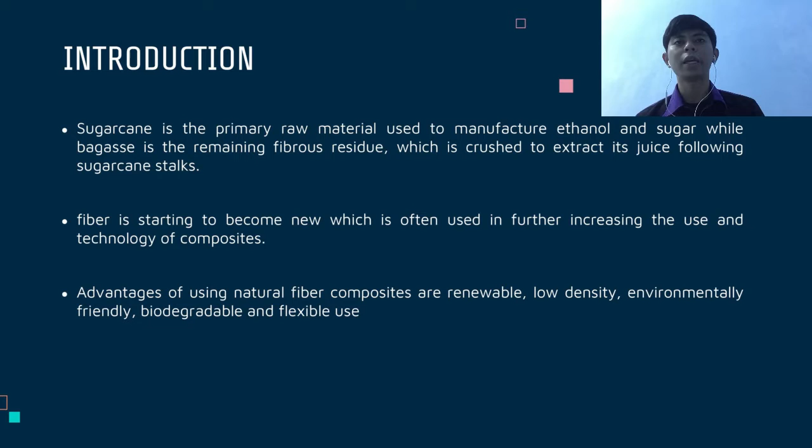So we move to the first part, which is introduction. As we know, sugarcane is the primary raw material used to manufacture ethanol and sugar, while the remaining sugarcane we call bagasse, which is the fibrous residue after we crush it. Fiber is starting to become new, and is often used in further increasing the use and technology of composites. The advantage of using natural fiber composite is that it's renewable, low density, environmentally friendly, biodegradable and flexible in use.

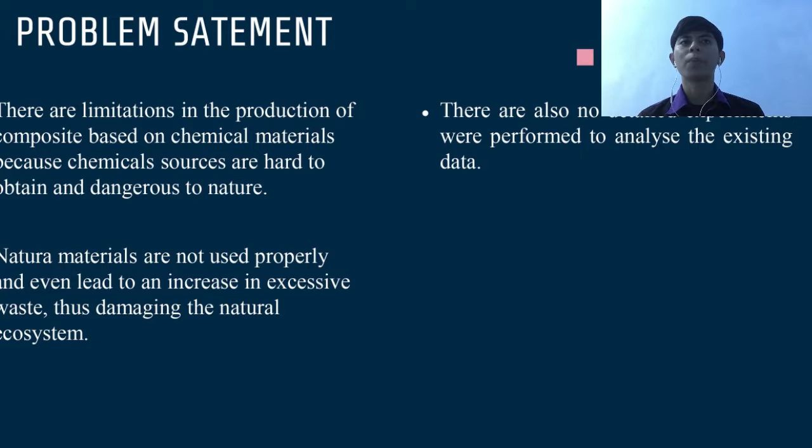Problem statement. There are 3 problem statements. The first one, there is a limitation in the production of composites based on chemical materials, because chemical material right now is hard to obtain and it is also dangerous to our nature. The next one is natural materials in our country are not used properly, and it even leads to excessive waste. This is also damaging our natural ecosystem. And the last one is there are no detailed experiments performed to analyze the existing data.

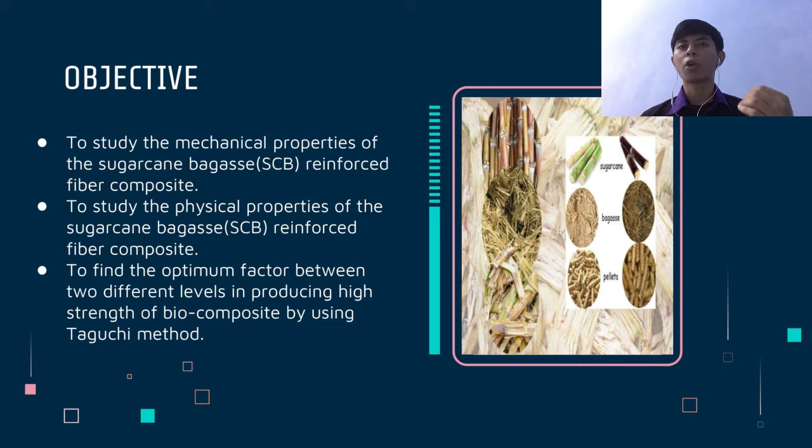For the objective, there are also 3 objectives. The first one is to study the mechanical properties of the sugarcane bagasse reinforced fiber composite. The second one is to study the physical properties of the sugarcane bagasse reinforced fiber composite. And the last one is to find the optimum factor between the 2 different levels in producing the bio composite using the Taguchi method.

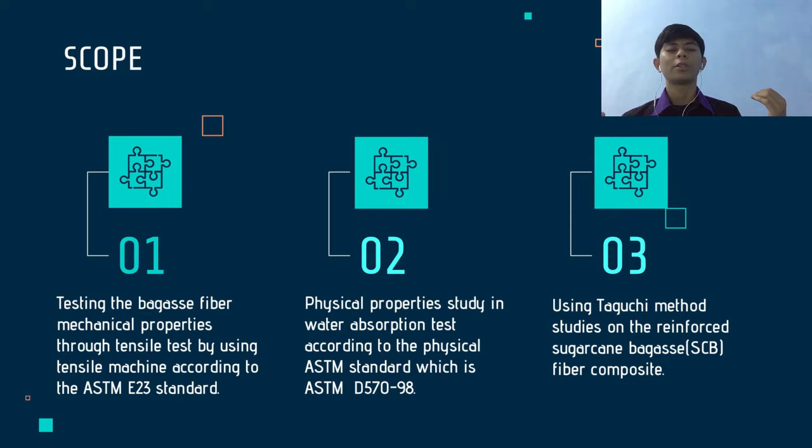For the scope, the first one is testing the bagasse fiber mechanical properties using the tensile test, with the universal tensile machine with the ASTM E23 standard. The second one is the physical properties study for the water absorption test, also using the standard ASTM D570-98. And the last one is using the Taguchi method to find the optimum level and optimum factor to create the best composition of our sugarcane bagasse biocomposite. So we move to the methodology.

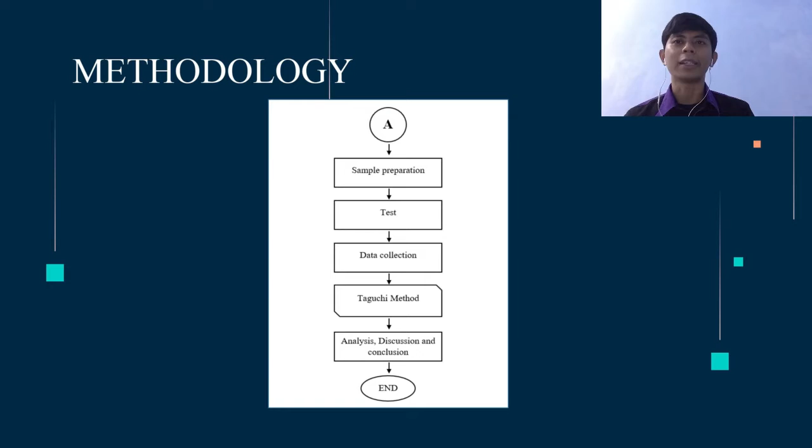This is our flowchart from A until the end. First, we need to do sample preparation, which is our bagasse biocomposite preparation. After the sample preparation, we do the tests, which are the tensile test and the water absorption test. After that, we do the data collection and the Taguchi method, so that we can analyze, discuss and further explain the experiment and the data collection. After that, we conclude all of that in one conclusion.

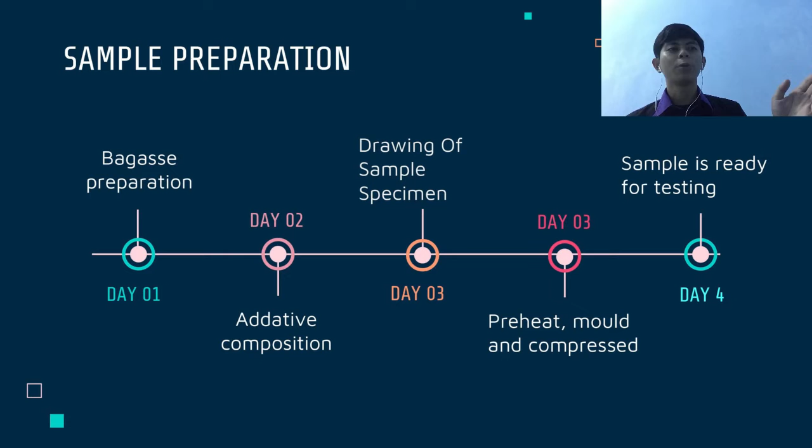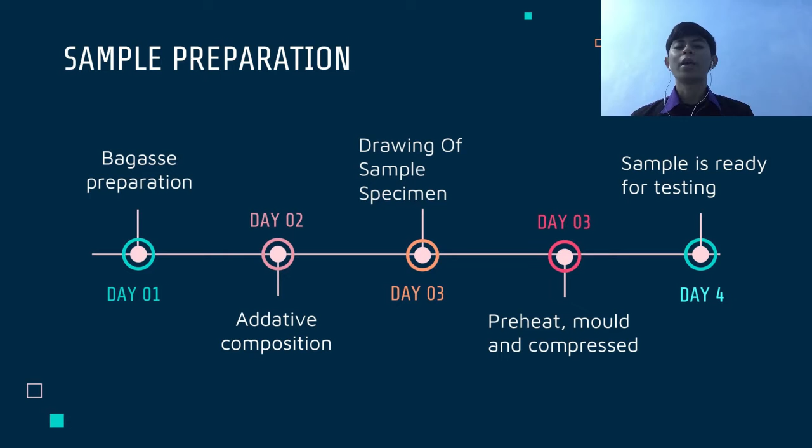We mix it, preheat, mold it, compress it into a mold, and then put it into the hot press and cold press machine. At the hot and cold press machine, the setup is 155 for the temperature and 5 ton for the pressure, the heating time is 60 minutes and the cold time is 20 minutes. After that we get our new biocomposite sample, ready for testing.

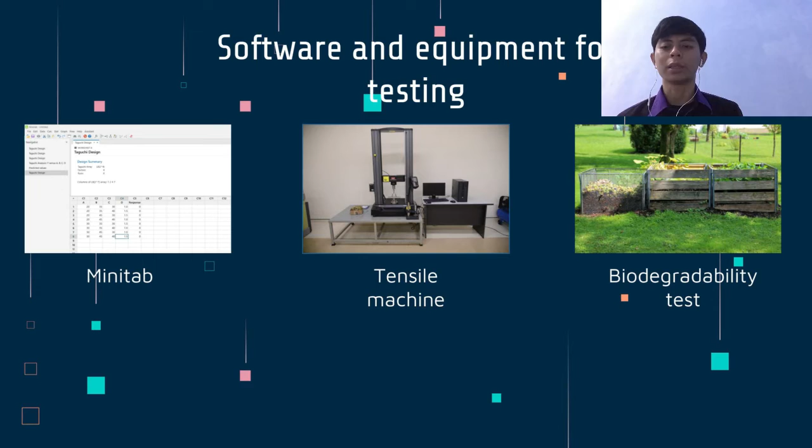This is some software and equipment for our testing. First, we have Minitab, to do the Taguchi method and analyze the data. Next, we have the universal tensile machine to do the tensile test. And we have a small beaker or container to do the biodegradability test. We move to the result and the discussion.

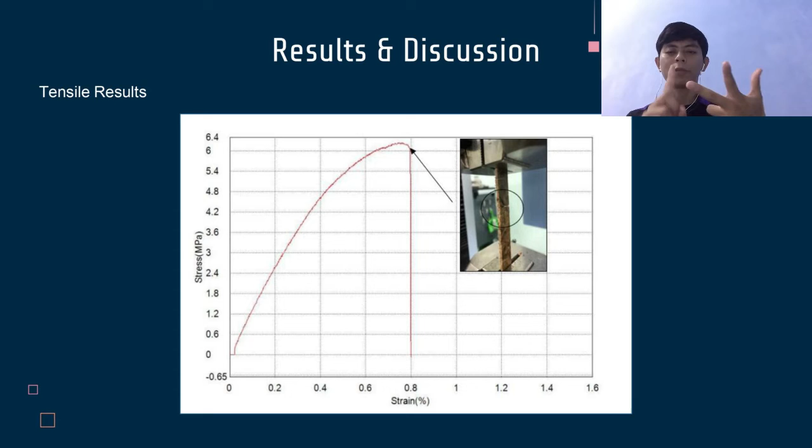This is my result for the tensile test. We did almost 24 tests, repeating each sample 3 times, and then we get the average value. The first graph represents the maximum parameters: the highest weight, 10 gram of bagasse, the bigger size, 10 mm, the maximum PVA, 5 gram, the highest cassava starch, 42 gram, and 30% glycerol. We mix it up, make a sample and test it.

So this is the graph. The graph also represents the highest value compared to the other parameters, which is the maximum parameter at the highest value for the tensile test.

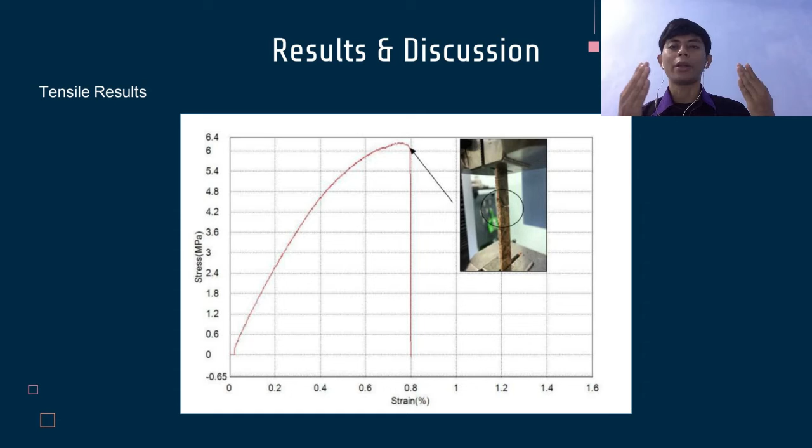So from the graph we can see that the peak point is the highest tensile value, which is almost 6.24 megapascal, and after the peak point there is no reading, or the reading is reduced maximally because our sample is breaking down, so the machine cannot define any reading.

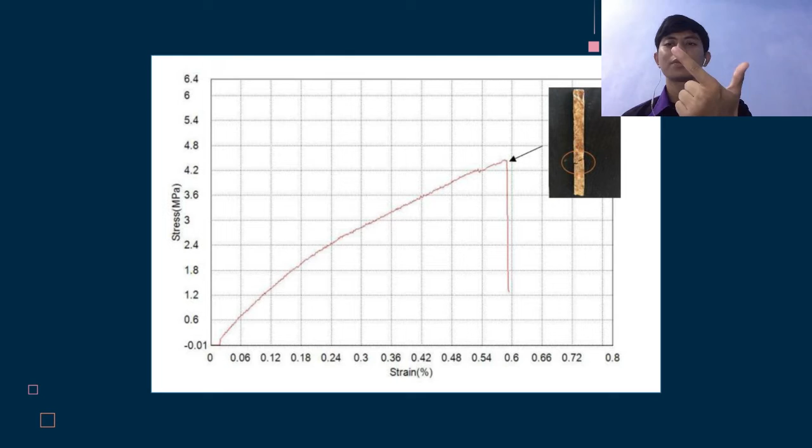So we move to the next graph, which is this graph. For this graph we use the maximum weight, maximum size, but we use the minimum level of the PVA and minimum value of the cassava starch and 30% of the glycerol. So the graph is like this. The pattern is the same as the first graph, but the value is lower than the first one. So the maximum point of the tensile value is 4.51, and the breaking point is at the bottom of the sample.

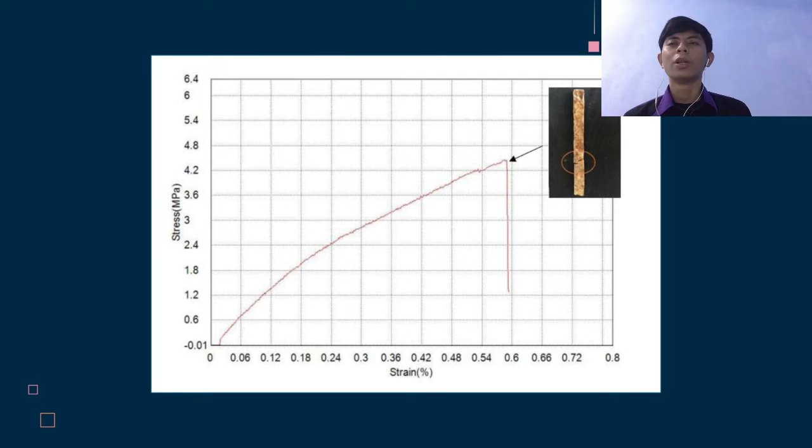So I need to explain that the breaking point of every sample is at a different point because we don't know the composition of the bagasse in the sample. I mean that maybe the bagasse is low density at the higher part, so it is easy to break at the higher part, and maybe it will be at the lower part or in the middle. So it depends on the composition also. So this is the same explanation as the first graph. The difference is just the maximum tensile value.

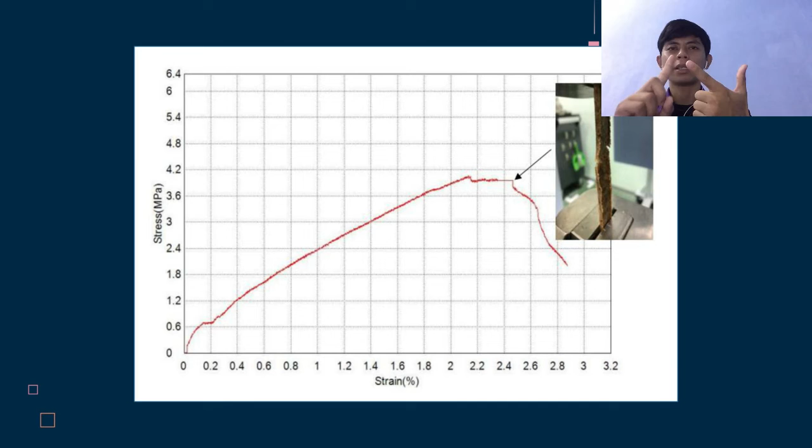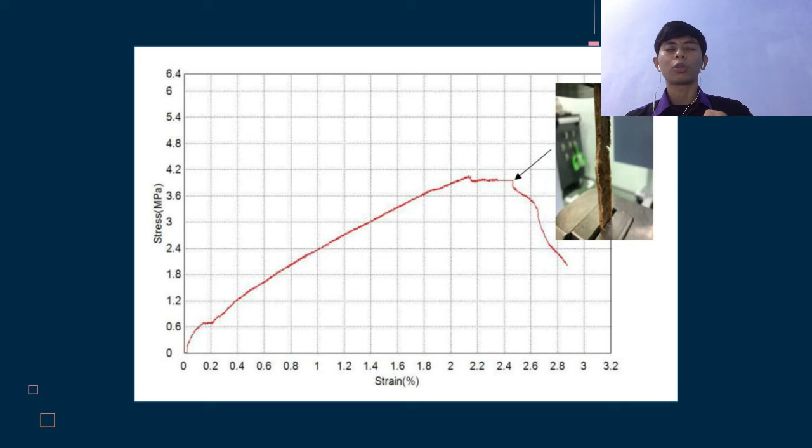We move to the next graph also. This graph represents the lower value of the bagasse, the highest size of the bagasse, the highest PVA and the lower cassava starch. This graph is a little different from the graph before, because we can see in the picture the breaking point is not a break like the one before, it is just stretching. So when it achieves the maximum tensile stress value, it still has a value because the material is not totally breaking up. It's just necking.

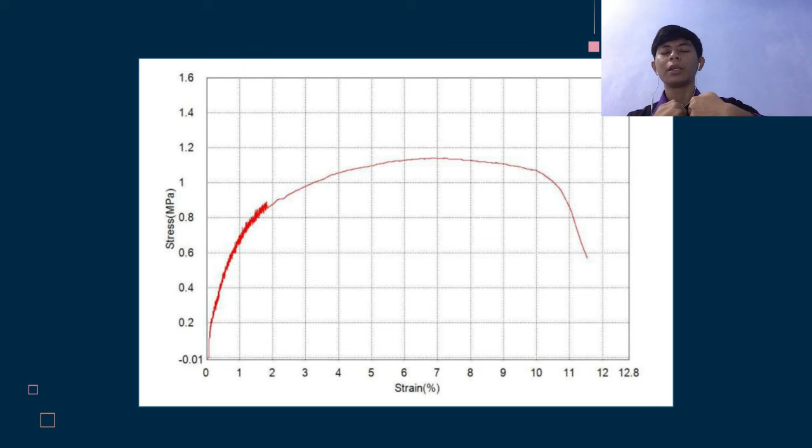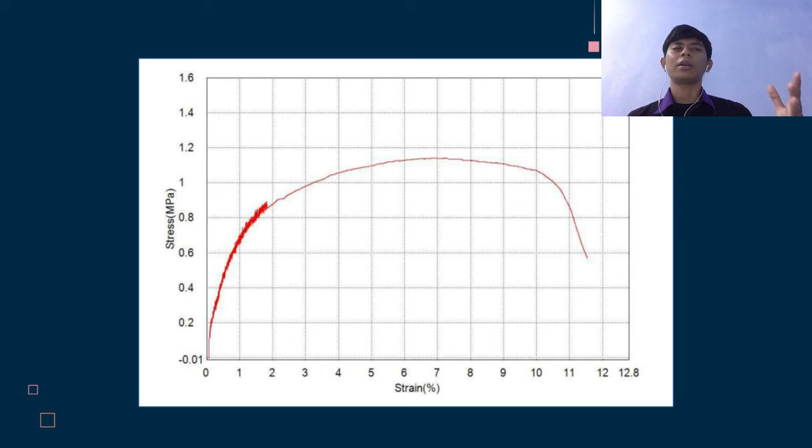So we move to the last graph. The last graph is for the minimum value of the parameters, where we use the lowest value of the weight, lowest size, lowest PVA, lowest cassava starch, and this is the result. So we can see there is no breaking point because the material, like the picture before, is just squeezing and necking, but the machine cannot define the breaking point. So the graph still has a value until it is totally broken, but it takes a lot of time to break because the composition is not the highest performance.

So from the data, we can see that the bagasse has high moisture in the water absorption, which is good for uses that need moisture for this sample, the bagasse fiber sample. So we move to the next one.

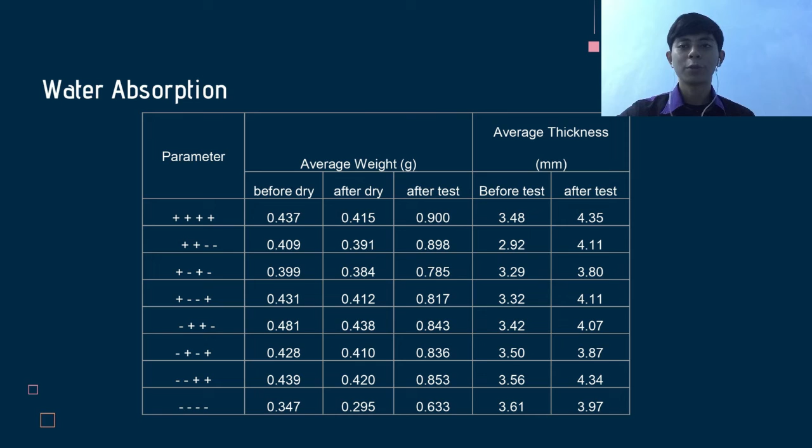So we move to the Taguchi method. The first graph represents the Pareto chart of the standardized effect, and the second is the main effects plot for the mean. As we can see from the first and second graph, the weight is important in the sample preparation, the main effect for the tensile and water absorption test, because when the weight is decreased, the tensile value and the water absorption average thickness and weight will be decreased also.

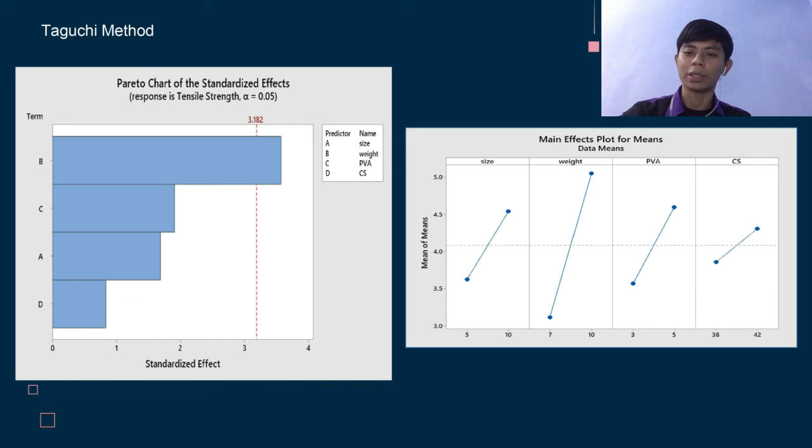So that means the weight is the important thing to be considered when we do the sample preparation, and after the weight we consider the PVA. After that we consider the size, and the last one we consider the cassava starch, as we can see in the graph.

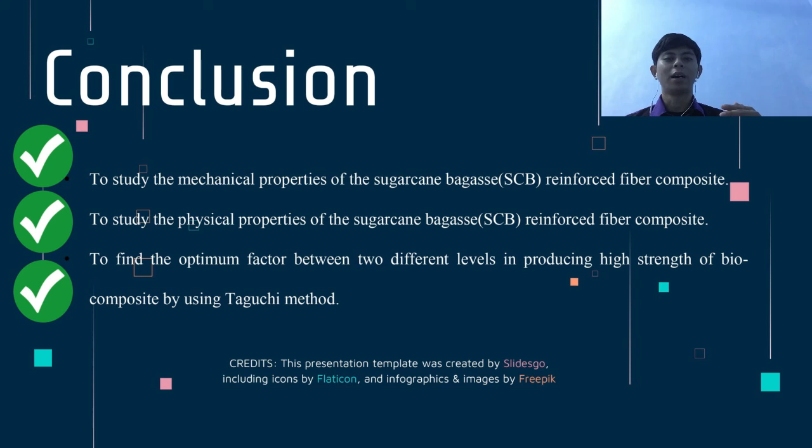So for the conclusion, I just want to say that I achieved all the objectives. The first one is to study the mechanical properties of the sugarcane bagasse reinforced fiber composite. The next one is to study the physical properties of the sugarcane bagasse reinforced fiber composite, and the last one is to find the optimum factor between the two different levels in producing the high strength biocomposite using the Taguchi method, which is the maximum parameter, and it has been proven by the Taguchi method.